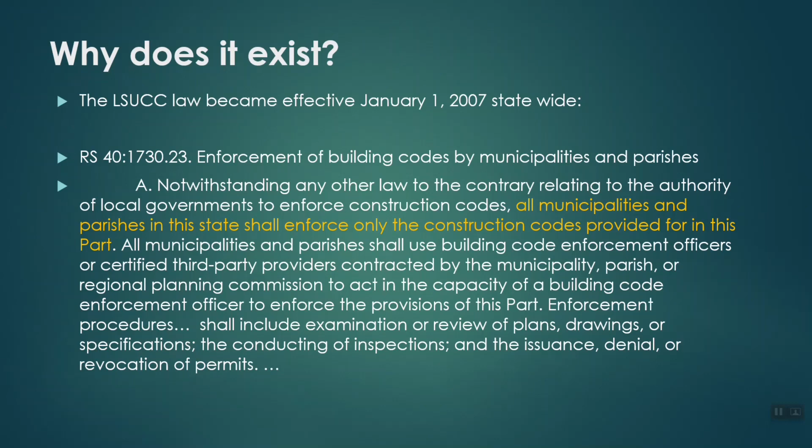On January 1st, 2007, the Louisiana State Uniform Construction Code became effective and required all municipalities and parishes in the state to enforce the adopted construction codes. This task is performed by building code enforcement officers or certified third-party providers contracted by the municipality, parish, or regional planning commission, and includes review of the plans, conducting inspections, and the issuance, denial, or revocation of permits.

Because industrialized buildings are constructed of modules or modular building units that are constructed off-site and arrive with some or all of the building systems, for example electrical, mechanical, plumbing, and structural, already built into the unit, a method of review and inspection was needed to avoid the units from being disassembled or destructive testing having to occur to ensure compliance with the adopted building codes.

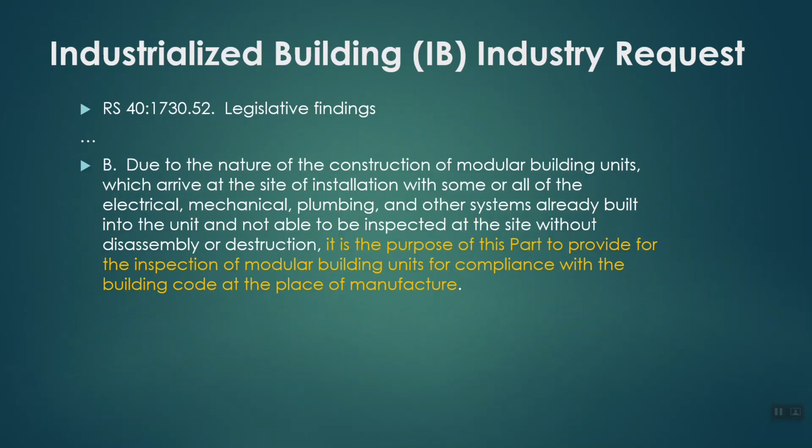The solution was Act 364 of the Louisiana 2007 regular session, commonly referred to as the Industrialized Building Act. The purpose of the act is to provide a method of plan review and inspection which occurs at the place of manufacture and provide those buildings with a decal which protects the unit against destructive testing when it is relocated anywhere within the state.

Without this decal, the local building officials are required to inspect the structural, mechanical, electrical, plumbing, and other systems in accordance with the currently adopted standards and codes. This would require destructive testing and potential renovations to address new code requirements each time the unit moves to a new location.

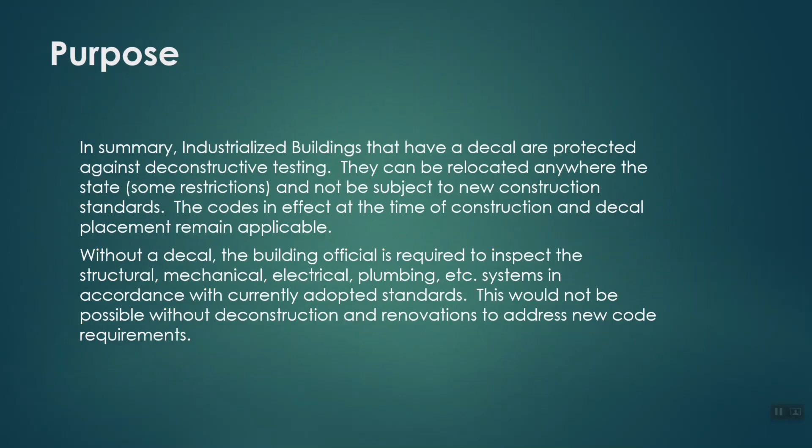Like the Louisiana State Uniform Construction Code, the effective date of the Industrialized Building Act was January 1, 2007. All industrialized buildings constructed after this date are required to meet or exceed the requirements of the building code and of the state fire marshal.

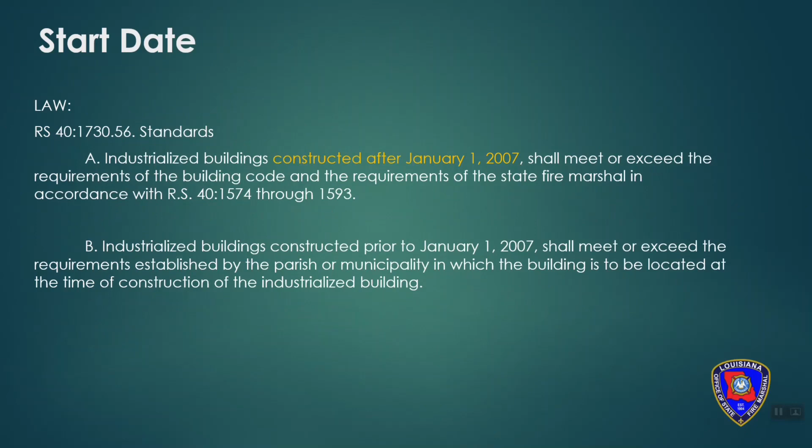So what is an industrialized building? An industrialized building is a commercial structure that is erected or installed using one or more modules or modular components that are constructed at a location other than the commercial job site and designed to be used as a commercial building when transported and erected or installed on the commercial site.

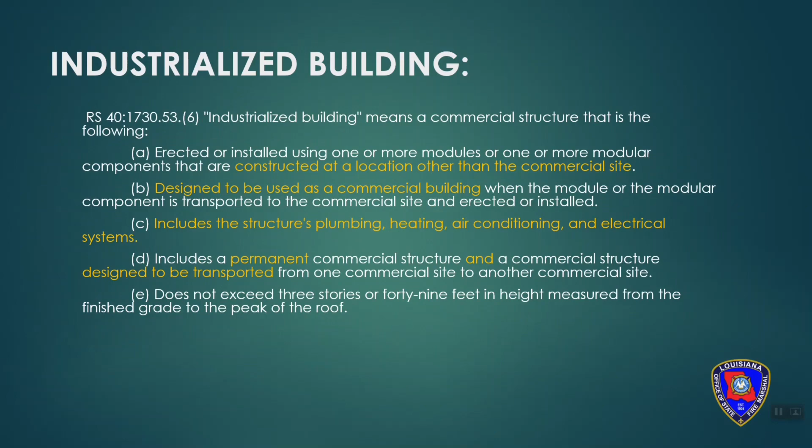This includes the structure's plumbing, heating, air conditioning, and electrical systems, and includes both permanent and temporary commercial structures. An industrialized building does not include buildings that exceed 3 stories or 49 feet in height when measured from the finished grade to the level to the roof peak.

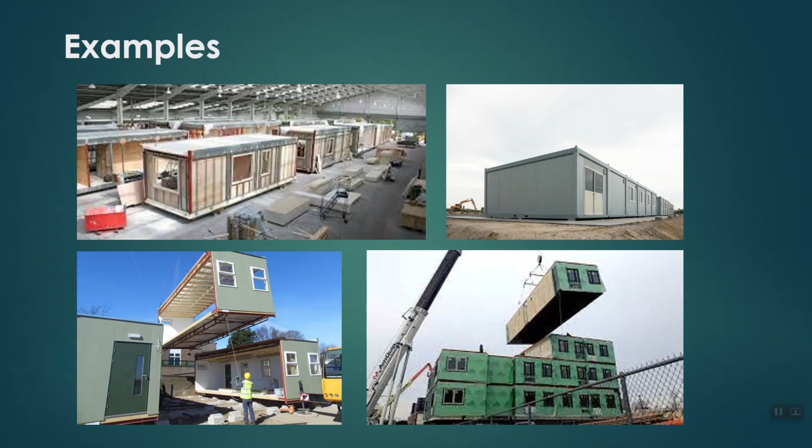It is important to understand an industrialized building and/or its modular components are constructed off-site and transported to the commercial site as a finished product, with the building systems covered by the building construction and interior finishes.

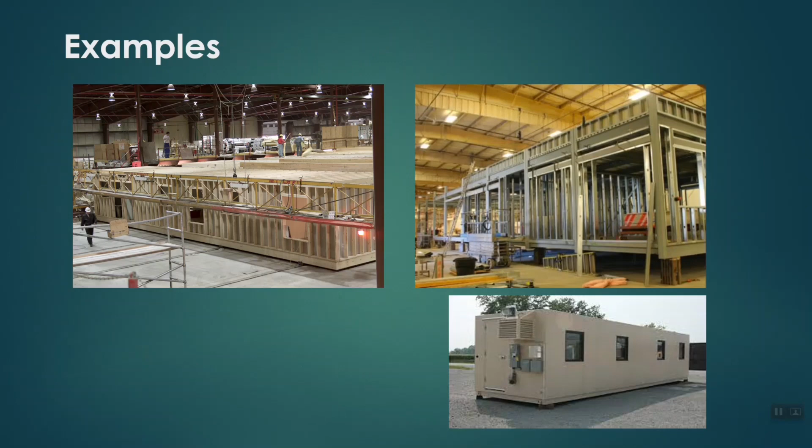On-site inspection of these components is not possible and must occur and be documented while under construction in the manufacturer's facility.

In accordance with the law, the State Fire Marshal has provided rules for the registration and regulation of manufacturers and dealers of industrialized buildings. All individuals or entities manufacturing buildings or components intended for installation in Louisiana must be registered as a manufacturer with the State Fire Marshal.

Additionally, all individuals and entities engaged in leasing or selling industrialized buildings or components for installation in Louisiana must be registered as a dealer with the State Fire Marshal. Information on how to register, as well as a list of registered manufacturers and dealers, can be found on the Louisiana State Fire Marshal's website.

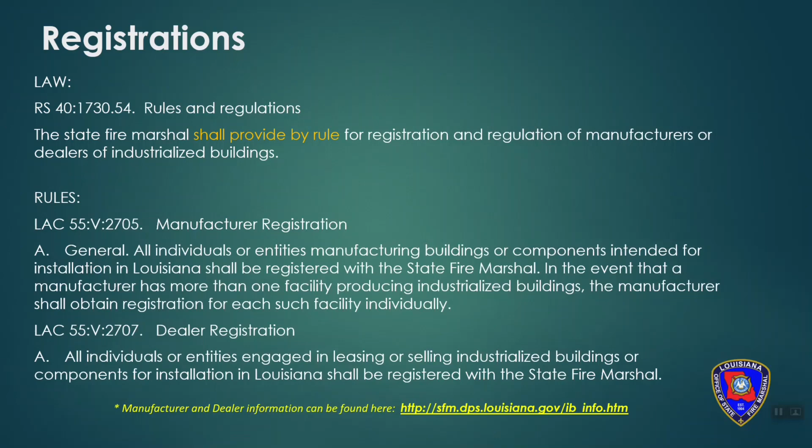In order to register as an industrialized building manufacturer, all applicants are required to provide a copy of a current, valid contract with a third-party provider for inspection services. It's important to note the third-party provider must be registered with the Louisiana State Uniform Construction Code Council.

Additionally, a building code plan review may be performed by a third-party provider, but must be documented in writing to the State Fire Marshal when submitted for decal plan review.

It's critical to understand third-party inspections are required for all buildings. Third-party plan reviews, however, are optional, but when provided, do not replace the OSFM review for life safety and fire protection requirements.

The manufacturer of an industrialized building shall submit plans and information, including structural calculations and energy code compliance documentation, to the state fire marshal for all new construction of buildings and renovations to existing buildings to ensure compliance with the building codes.

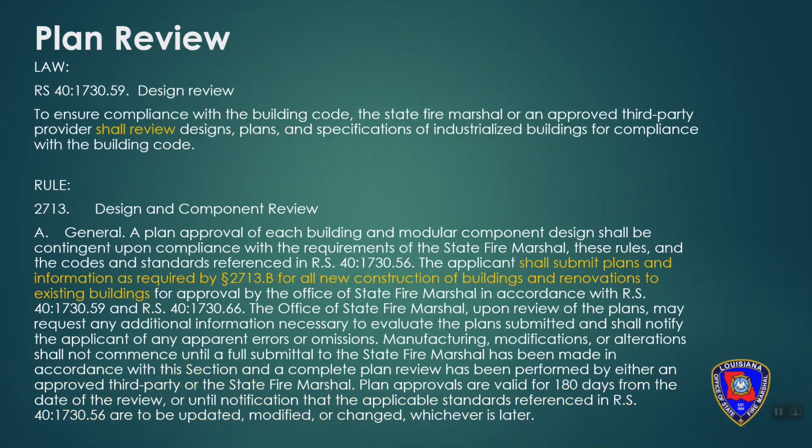Manufacturers electing to utilize a third-party plan reviewer must document that in writing to the state fire marshal, and the plan review report from the third-party provider must include, at a minimum, the name of the registered third-party provider and the Louisiana State Uniform Construction Code Council issued registration number.

The report must also include the name of the manufacturer and the state fire marshal issued registration number, the date of the plan review, identification number, plan number, or serial number of the building or component reviewed, a list of all applicable codes and editions reviewed for compliance, a statement indicating the information in the plan submittal has been reviewed for compliance, and a final report indicating any nonconformities observed and corrective actions required, if applicable.

The plan review report and a copy of the reviewed, approved plans must be submitted to the state fire marshal for oversight, along with any additional information required with the design plan submittal.

While manufacturing is permitted to begin upon approval from the registered third-party reviewer, any additional deficiencies detected by the state fire marshal during the design plan submittal review must be corrected, and oversight of the corrections performed by the state fire marshal before decals are affixed to the building or component.

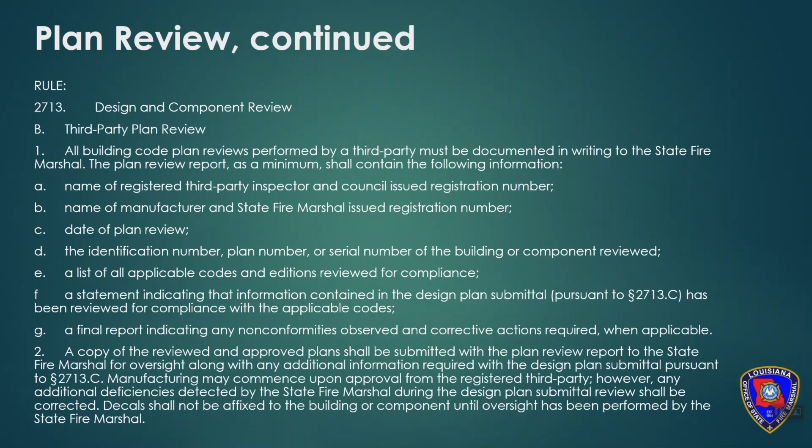Submission of industrialized buildings occurs in two phases or submittals. First, the manufacturers must submit the building or component for decal review.

The scope of these IB reviews is limited to the aspects of construction performed at the place of manufacture. The IB plan review letter shall not be used to obtain a permit for site installation, but rather is used for the decal request process.

The second review, or site-specific plan review, is submitted by the industrialized building dealer or owner for review and approval in order to obtain a building permit from the local applicable jurisdiction for the site-specific installation. The IB decal number shall be provided by the owner upon submittal to the fire marshal for site-specific review.

Once the decal and limitations of the initial IB review are verified and confirmed, the scope of the review will be for site-specific elements and other items not reviewed under the decal review. Limitations of the initial IB review include the approved occupancy classification, floor plan design and layout, and the maximum wind speed for the proposed location.

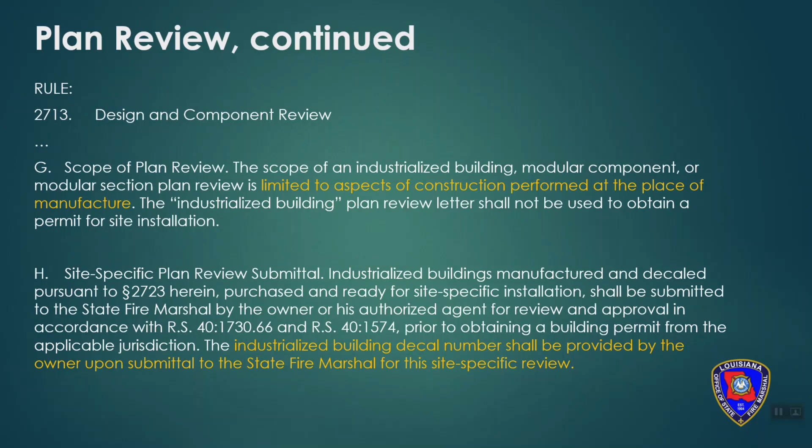It is important for dealers, lessees, and owners to understand the limitations of any industrialized building prior to submitting for site installation review. Like the plan review process, inspections also occur at two distinct phases.

First, a registered third-party inspector is required to inspect the construction of the industrialized buildings at the manufacturer's facility while the units are under construction.

Upon submission, review, and acceptance of the site installation review, a building code enforcement officer or registered third-party inspector and the state fire marshal or his designee shall inspect the construction involving the site installation of an industrialized building, which includes the construction of the foundation system and the erection and installation of the module or modular components.

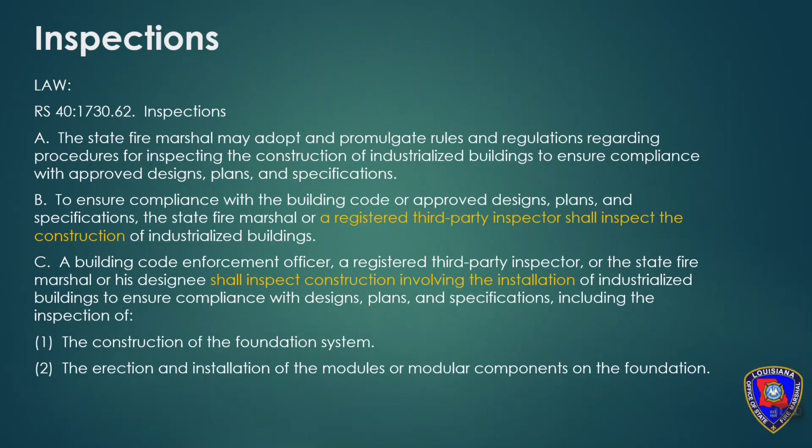All industrialized buildings, modular sections, and modular components approved by the state fire marshal shall be affixed with the Louisiana Industrialized Building decal. This decal serves as verification and acceptance of the construction approved by the design plan review and inspection of the unit at the manufacturer's facility.

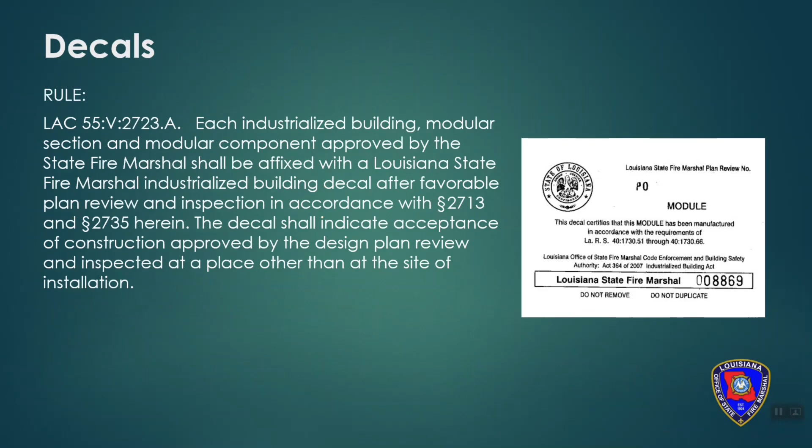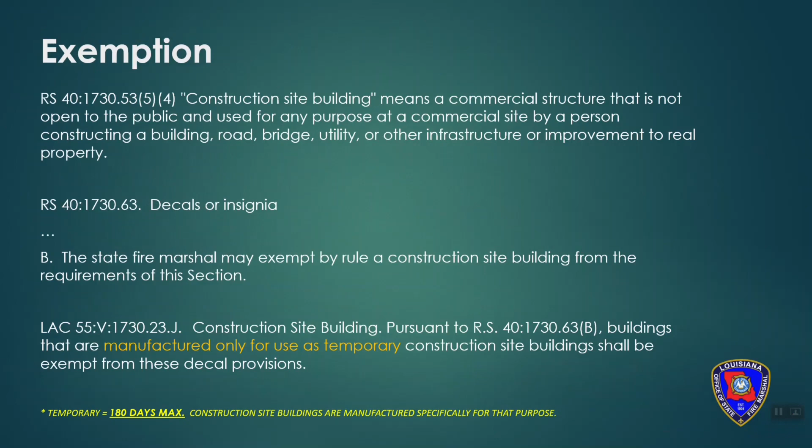Only construction site buildings are exempt from the decal provisions of the Industrialized Building Act. Construction site buildings are those commercial structures that are not open to the public and used for any purpose at a commercial site by a person constructing a building, road, bridge, utility, or other infrastructure or improvement to real property. Additionally, these buildings are used for temporary purposes only, meaning they are on site for 180 days maximum.

As previously mentioned, the purpose of the Industrialized Building Act and subsequent decaling is to provide verification of a building's review and inspection in accordance with the adopted codes at the time of construction. Any industrialized building bearing a decal is not required to comply with future amendments to the building code approved by the council. However, any elements that are altered or changed in existing industrialized buildings shall be made to conform to the requirements of the building code for new construction.

Additionally, renovations exceeding 50% of the value of the modules or modular components shall require the entire building to be brought into compliance with the requirements of the building code for new construction. If the renovations are less than 50% of the module or modular component's value, only the modified or altered portion shall comply with the building code for new construction.

It is again important to note any alteration or renovation of the industrialized building bearing a decal must be made at the manufacturer's facility and submitted to the State Fire Marshal for review.

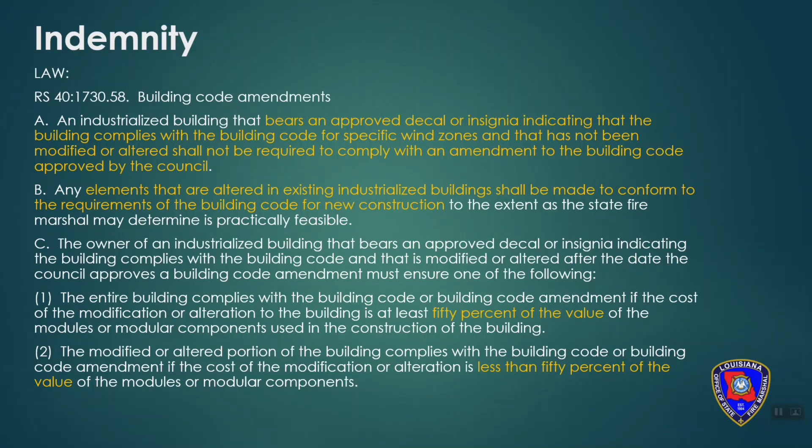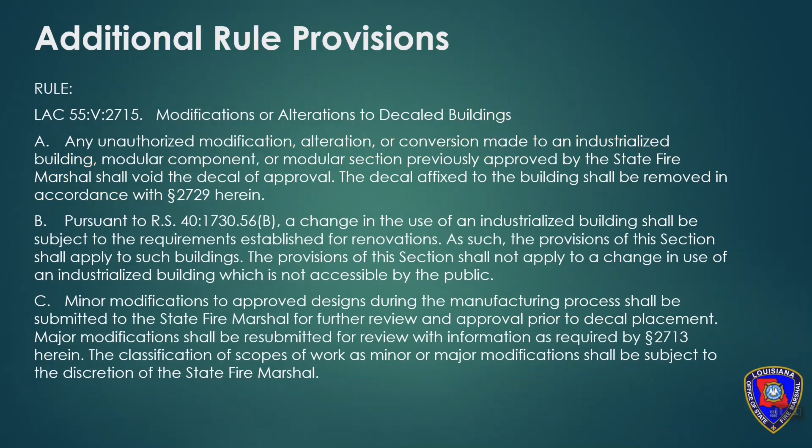Unauthorized modifications or changes to an industrialized building bearing a State Fire Marshal decal shall void the decal of approval, and that decal shall be removed in accordance with Louisiana Administrative Code Title 55, Part 5, Section 2729. Additional provisions are provided under Section 2715 for the change in use of industrialized buildings, as well as minor modifications to approved designs made during the manufacturing process.

Any modification, renovation, or change of occupancy of an existing industrialized building bearing a decal must be submitted to the State Fire Marshal for decal plan review and undergo the same building and system inspections as required for new construction. No work shall begin on an existing unit until the plans have been approved by the State Fire Marshal.

Once the building has undergone all required inspections and tests during the renovation and construction process, the State Fire Marshal will authorize the placement of a new decal to be affixed to the building.

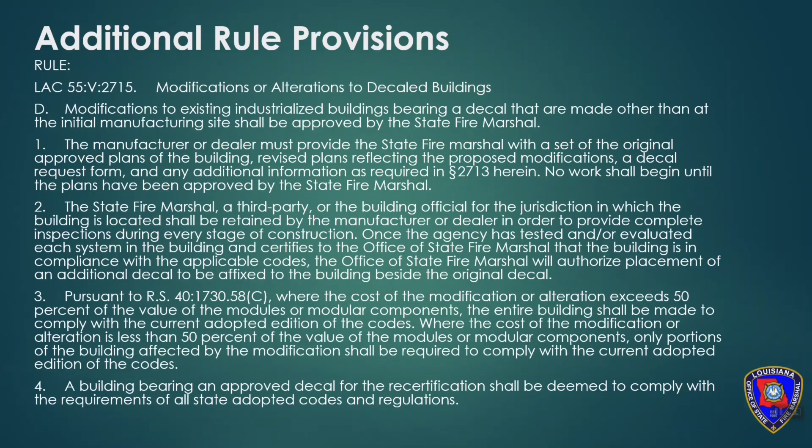For all new buildings and components, prior to leaving the manufacturing plant, a data plate shall be permanently mounted on or about the electrical panel, providing the required information stipulated in Section 2713.I.

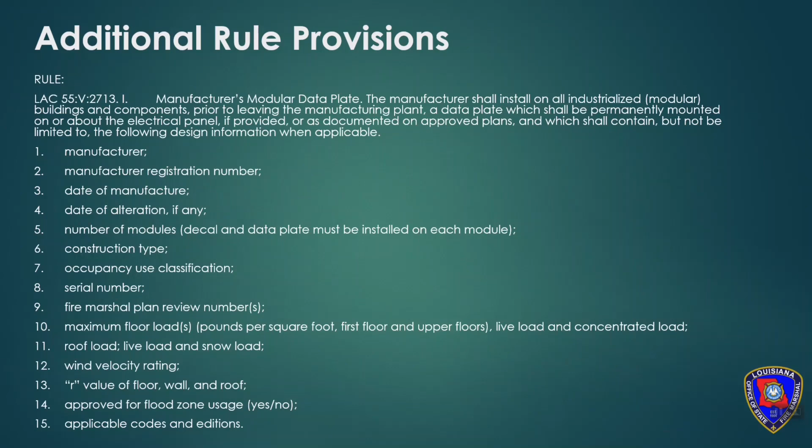All life safety systems and property protection systems must be integrated, installed, certified, and serviced by a life safety and property protection contractor licensed by the State Fire Marshal's Office. Licensing information, including a searchable database, can be found on the Fire Marshal's website.

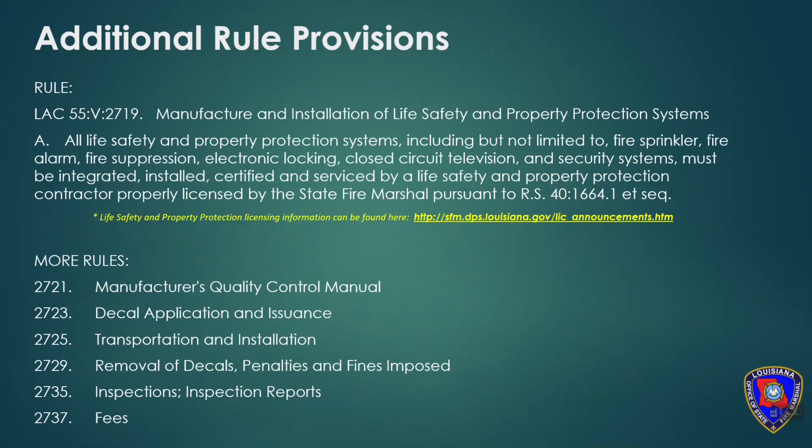So what common questions do we receive regarding industrialized buildings? So what is not an industrialized building? Shell buildings and residential trailers are not considered industrialized buildings. A shell building is a manufactured building documented to contain no mechanical, electrical, or plumbing from the factory. Examples of these include the storage buildings you might find at a local hardware store that contain no interior finishes or building systems. These interior finishes and systems are constructed and installed on the commercial job site.

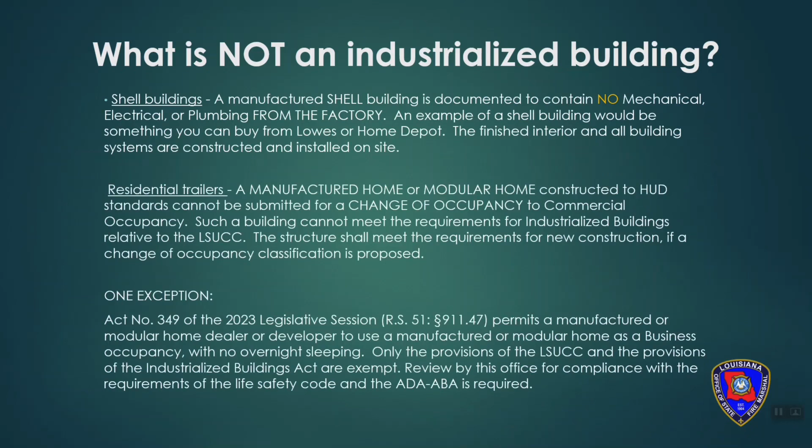Residential trailers, including manufactured homes or modular homes, or those constructed to HUD standards, cannot be submitted for a change of occupancy to a commercial occupancy. Such buildings cannot meet the requirements of the Industrialized Building Act relative to the Louisiana State Uniform Construction Code. The structure shall meet the requirements for new construction if a change of occupancy classification is proposed.

One exception, in 2023, Act number 349 was passed that permits a manufactured or modular home dealer or developer to use a manufactured or modular home as a business occupancy with no overnight sleeping. Only the provisions of the LSUCC and the provisions of the Industrialized Building Act are exempt. Review by the Office of State Fire Marshal for compliance with the requirements of Life Safety Code and the Americans with Disabilities Act is required.

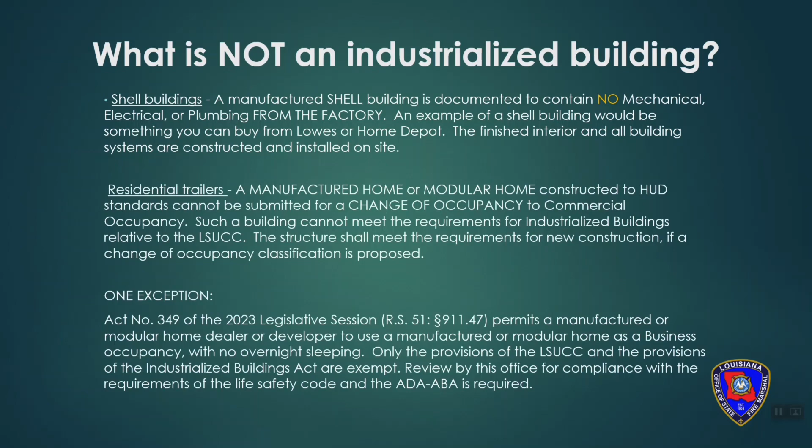Can I change the configuration of a building's modules to suit different needs? Optional configurations are not allowed without a review. Any proposed optional configurations not reviewed under the initial decal submittal shall be resubmitted individually with drawings for that specific configuration. Any configurations acknowledged under a decal plan review will be permitted.